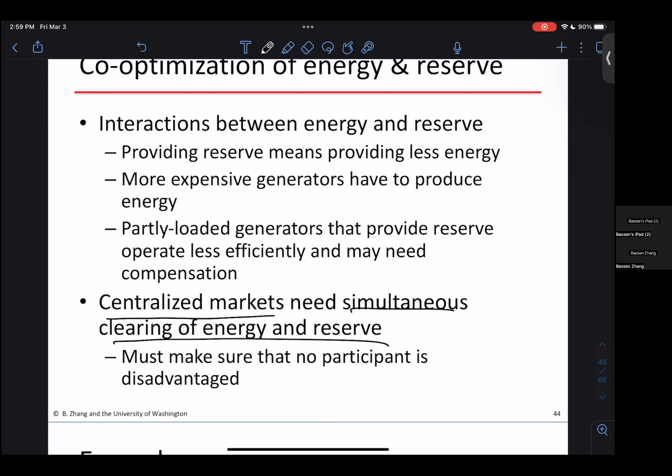And we're not going to think of a sequential way, right? So we're not going to think that energy is more important or less important or has first priority. Today, you just put everything into an optimization problem and solve this whole thing at once, instead of doing this sequentially. So let's look at an example. These things will become more clear if we go through this example. So this is a typical example.

So I made the marginal cost constant for simplicity. As you can see in this kind of example, this says that I can provide this energy at this marginal cost. This is the maximum generation limit for each generator. And some generators can provide reserves, some generators cannot provide reserves. So we're going to write out a system where the energy has to meet the load, and you have to meet some reserve margin for the system.

And we're going to figure out for each generator how much energy you should provide, how much reserve you should have. What is the balancing between energy and reserve given this type of market? Any question about the data? Okay, so why might this number be 0? So why would, let's say, a generator not be able to provide reserve?

So what kind of generator? Let's say I'm extremely cheap. I can provide a lot of energy, but not reserve. I cannot do reserve. Technologically, what limits you from providing reserve? Right. So something like solar and wind, where you cannot do reserve, or something like nuclear, where your ramp rate is very slow. So this is either solar or wind.

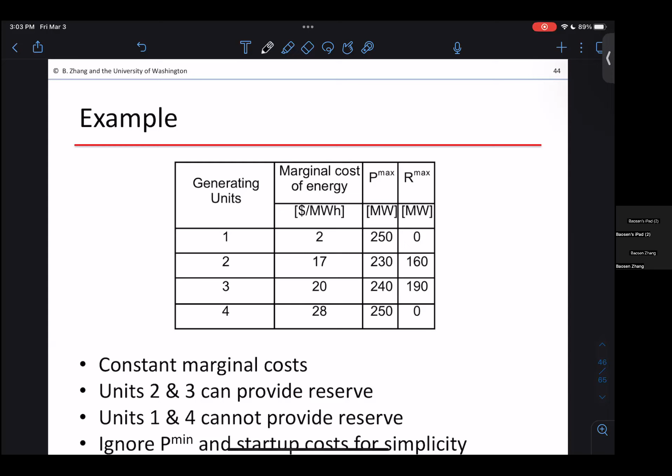So energy and reserve are not separate things for the generator, right? If I'm showing you a table like this, it doesn't mean I have 230 of power plus 160 of reserve. It just means the power you produce and the reserve you provide, summed together, cannot be larger than 230. And the reserve itself cannot be larger than 160. That's what this graph is showing. It's not separate things.

You're a generator, you're providing power as a generator, right? So energy and reserve are coupled together in this kind of generator. Any question with this concept, this graph? That's typically the hardest concept. Good. But what determines the value for ramping? So I just made up this number, this is just a number I made up, right?

So for example, let's say again you look at unit 3. You have 240 of maximum power generation, 190 of reserve. What this is saying is that suppose you are operating here, then you're asked for reserve. What's limiting you is that in the next 15 or 20 minutes, the maximum you can ramp is 190. You cannot go faster than 190. So the maximum amount of reserve you can provide is 190. That's called a ramp limit.

Right, so you're not running out of maximum generation capacity, you just can't ramp that fast. If you go here, you can ramp this, but you're just running out of capacity. So this is called capacity, or headroom; it means capacity. How much capacity have you got left? Okay. Any other questions?

Okay, so this is again, you're providing energy and reserve at the same time, right? So we're gonna set up this market. We're gonna assume that the market is perfectly competitive. We're gonna assume that the generators submit their bids for energy, and then the system operator will meet the demand, right? So we'll meet some demand while satisfying this reserve.

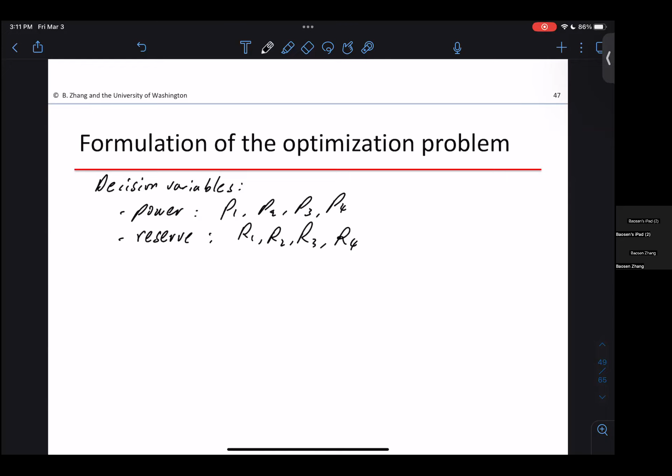In addition, you also have the reserve: R1, R2, R3, R4. So you're not only optimizing over power, you're optimizing over reserve, both together. So what is the objective function? It's given by the price multiplied by power. So the cost is 2 times P1 plus 17 times P2 plus 20 times P3. Okay, so you're trying to minimize this number.

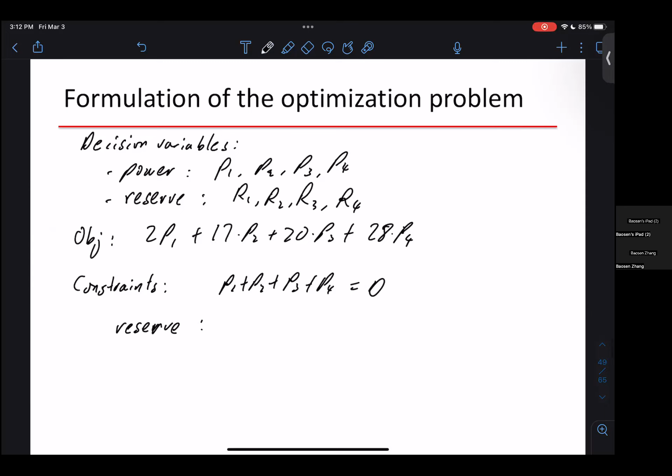Then we have a bunch of constraints, right? The first constraint is our load balancing constraint equals to demand. So the power you generate has to be equal to demand. How do I write the reserve constraint then? I have a power constraint, but let's say my reserve always needs to be at this level. What kind of constraint will reflect that I have a reserve of 250 megawatts?

Equals to 250? Right, so you want it to be at least 250. The important thing here is you cannot write this equal to 250. What you want is to say, I want at least this much reserve. For load, this is an equal sign: your power generated must equal the load. For reserve, it's different because you're not using the reserve. It's a requirement, something that's called if something happens.

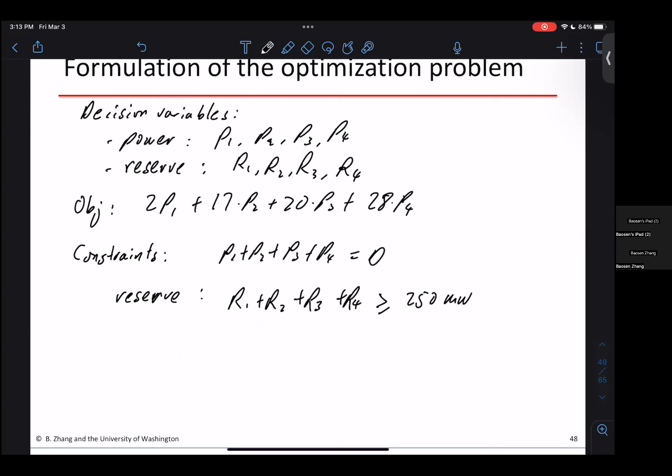So having 250 megawatt reserve is larger than or equal to. You can do 250, you can be bigger than 250 as well. This sometimes makes a difference, actually, having more flexibility on this side. So this is the reserve constraint. Again, the difference is this is actual power being transmitted in the system, and this is what's left over that can be called. So these are your two constraints.

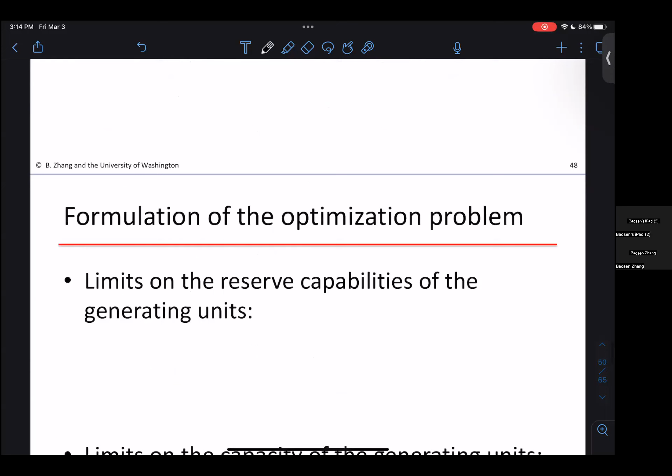And of course you have the generator limits. You have the reserve limits now, because not every generator can provide reserves. So you have some limits on R1, R2, R3, R4. For R1, it doesn't provide reserve, so it will be 0.

R2 can go between 0 and 160. R3 can be between 0 and 190. R4 doesn't provide reserve, right? So this is the reserve that these generators can provide, and they're bounded between these ranges. So if it's 0, we're just writing R1 equals 0 here. That's fine.

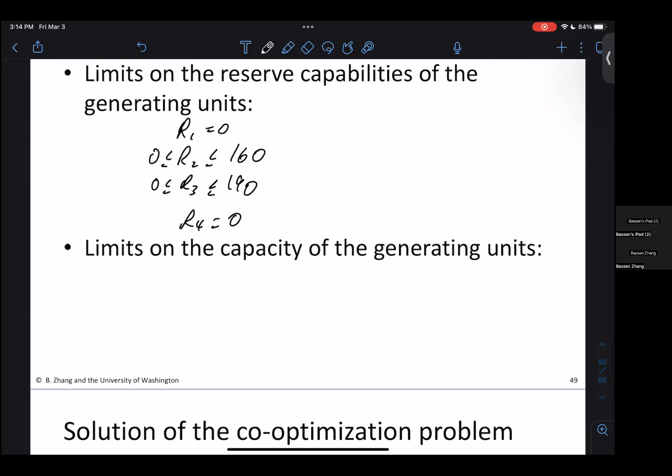Now you have the capacity limit on the generator. For the first generator, the power and reserve together cannot be more than this limit, so this is 250. Right, so these are the limits. The limits reflect that if you're a generator, you're providing both power and reserve. So this is the total when you sum, and this is the limit. That's the coupling constraint between power and reserve.

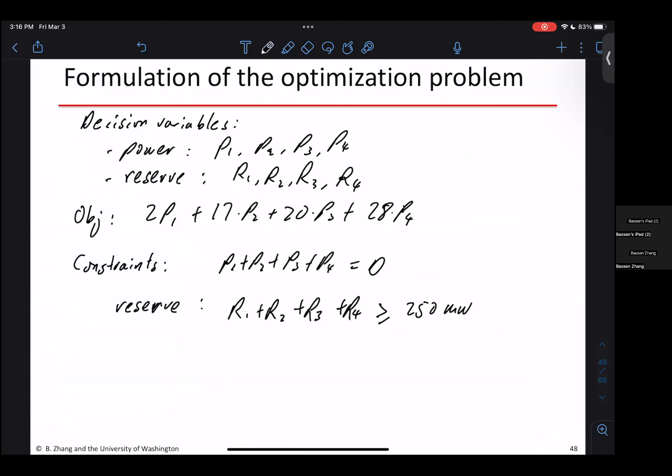Of course you have the more trivial constraints. The power has to be larger than 0, and together when you add them, they have to be less than this total generation. So these are your constraints. Given different demand, you can solve this constrained optimization problem to get what P and R are. We have seen this before: it's an inequality and equality constrained optimization problem. In principle, you can solve this and get the result.

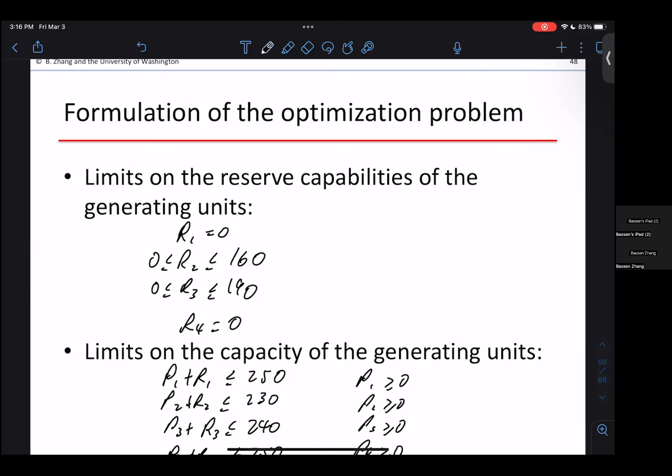In your homework or the final, you will not be asked to solve something this large. There's a lot of choices. Most times in your homework it would be obvious how you do this or what the values are, but this is the principled way of doing this. Questions about this formulation?

So how do I get prices out of this? How do I get the price for energy and the price for reserve? Let's say you solve this problem and got some numbers. You have to pay people, both for energy and reserve. So how do you compute the prices? How do we compute the price for energy? The Lagrangian multiplier for this constraint. How about reserve? Just the Lagrangian multiplier for this one.

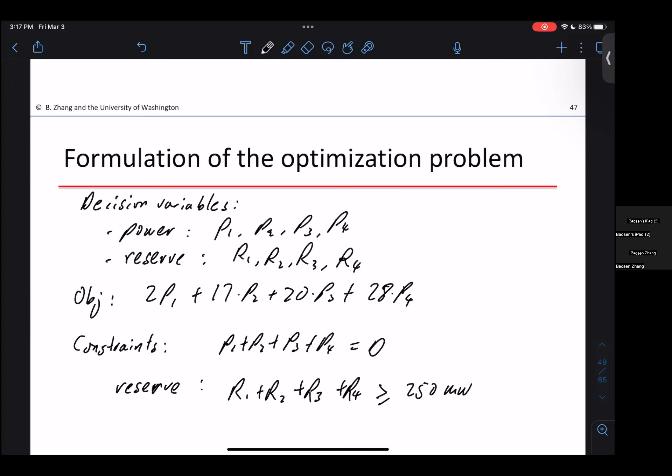So this is how the market's actually constructed. You write out the optimization problem, you look at the constraints associated with demand and reserve, and these are by definition the prices. You solve the problem, figure out the Lagrangian multipliers for both, and those are your prices. Let's say lambda, the multiplier associated here, is the price of energy, and mu, the Lagrangian multiplier here, is the price of reserve. This is the definition of how our markets get prices.

In practice, when you say I'm setting up a power market or introducing new products into the market, what you're doing mathematically is creating a new constraint and interpreting the Lagrangian multipliers of that constraint as the prices of the new product. Whatever product you need, you must express it as a constraint, and the associated multiplier is your price. That's how all these products work.

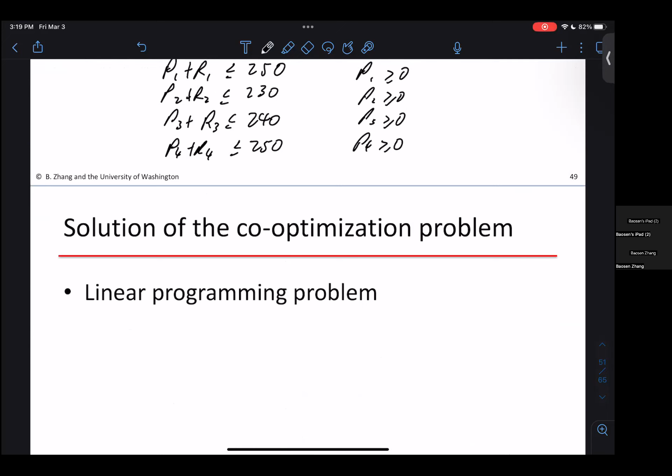In this case, everything's linear, so it's well defined. If it's not linear, it's a lot more work to define the prices, but that's still how we think about it. If you write down this problem, it's just a big linear programming problem: minimizing cost subject to a bunch of constraints. In practice you get your computer to solve this; it's not very hard. You read out the multipliers, and that's your price.

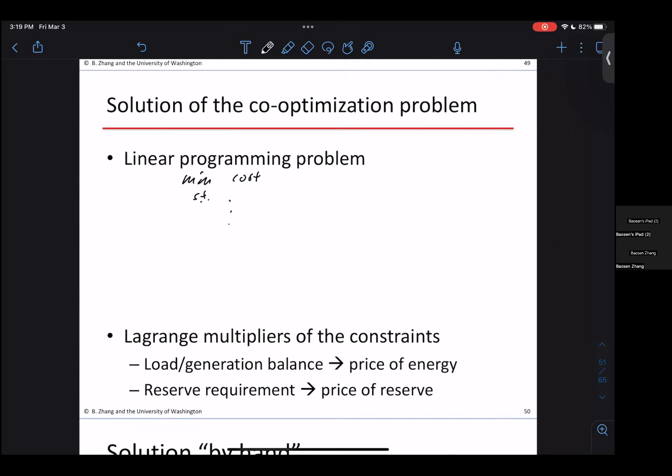We're going to look at the solution by hand a little bit. This is constructed so solving by hand is a bit easy. In your homework and final, the problem will be constructed so you can solve it by hand. For this problem, observe that unit 1 is the cheapest and it cannot provide reserve. So you always dispatch this unit to provide all the energy you need.

And then you can reduce the constraint. Looking at reserves, you can think about different reserve constraints and different power constraints. These two are the only two that can provide reserve. So together, you have three constraints on reserve. You have a lower bound on the sum. You have an upper bound on how much each of them can provide. Okay, so any questions on this?

Okay, so how do you get this number? Even if R2 is at its maximum, you still need 90 from R3. Right, so that's just making this constraint a bit easier to work with. You still need 90 from the other generator to get to 250. Even if R3 is 190, you still need 60 from the other generator. So you can summarize these into this form. Okay, so this is your summary. And what it tells you is this induces a small upper bound on the power generation.

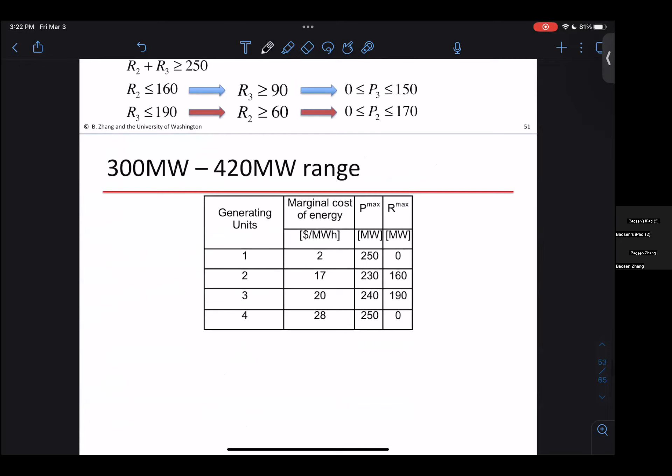Right, so now remember our load. We're going to look at what happens if your load varies between these ranges. Given different ranges of load, the behavior is different. So let's say my load is between 300 and 420. Okay, so let's say this is the load. So how will you generate? First you get unit 1 to produce 250. This is always the case. Okay, so unit 1 just provides 250.

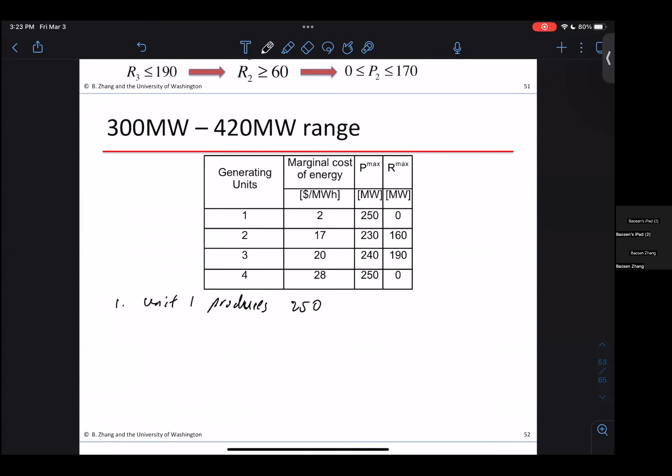Then unit 2 is the cheapest generator after this one and has a limit from 0 to 170. Okay, so this is where the 420 range came out, as you add 250 to unit 2's range of 170. So being within this range, unit 2 produces the rest. As the second cheapest generator, we have enough capability to provide the rest of the energy. So you just produce the rest up to 420, up to whatever you need.

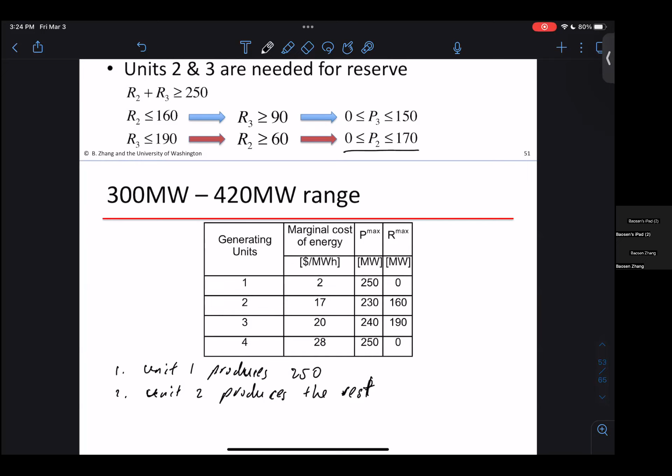What is the marginal cost for energy here? What is the marginal price for energy? So unit 2 is producing the rest. Okay, so unit 2 is the marginal unit. So here the price for energy is $17 per megawatt hour. Any questions about this? Okay, got it.

Right, so if it's exactly equal, you take the lower one by convention. But that basically never happens. Yeah, if it's exactly equal, you take the lower one. I forgot actually which one you take. There's a convention that you take. Yeah. But otherwise, any questions?

Okay, so the more interesting question is, what is the unit price of reserves? What about reserves?

What happens to reserve? What is the unit price for reserve in this case? I need 250 of reserve, okay, within this range. So I dispatch generator one, I dispatch generator two up to its limit of 170. Do I need to pay anything for reserve? Does the reserve have a price?

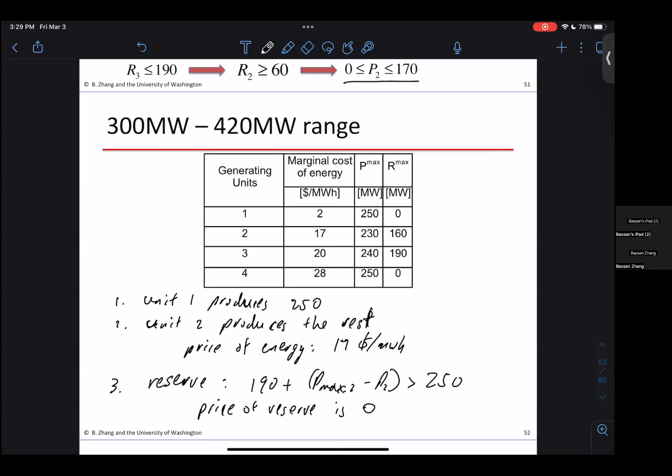Okay, so then this changes if your load keeps increasing, right? So let's say you go above 420, then what happens is your unit two is capped at 170. So unit two, even though it seems to have a maximum generation of 230, because you have to provide reserve, you appear to be a smaller generator. So you cap at 170. So here, unit 3 is marginal.

So unit 3 being marginal, this means the price of energy is 20 per megawatt hour. Okay, so that's unit 3's price. So now the reserve is more interesting. Reserve is no longer free. So reserve now has a price.

Okay, so let's think about the reserve price. So reserve price means if I need to increase my reserve beyond 250, what happens? Let's say I increase my reserve a little bit beyond 250 to 251. Where does this 1 megawatt of reserve come from in this setting? How would I change what happens to unit 2 and unit 3 if I increase this reserve by 1 megawatt?

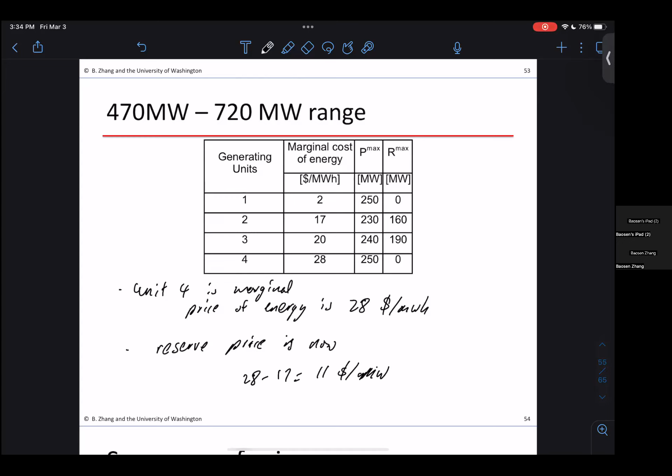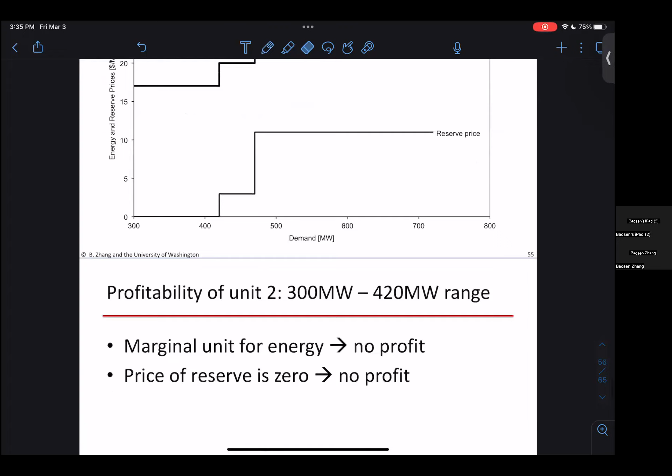So we're not going to compute the profit. Let's skip computing profit, but you can go in and compute the profit for things generating both energy and reserve. Reserve can make money depending on what else is happening in the system. So normally as a generator nowadays in the market, you go in and you bid your energy and reserve at the same time. So you tell the system operator, this is my energy production cost, plus I can do this reserve. And then the system operator clears everything at the same time.

All right, any questions? Okay, so that's how things are done today. In the next 10 minutes or so, we'll talk about demand side provision. So until now, the generator provides reserve. The demand pays for this, right? So demand pays for everything in the power system market. If you're demand, you pay for whatever service is there. You pay for reserve, you pay for everything like that.

But once people were talking about ancillary services, it was very quickly recognized that demand can also do ancillary services, right? Ancillary service just means that you should be able to cover the load. So generation has to equal the load. Then when something happens, it's equally good if I increase the generation or if I decrease the load. So decreasing the load also, in some sense, provides ancillary services. This is a huge area of research and people are trying to put it into the market. It's basically demand response. If demand has some capability of providing services, then demand should get paid, rather than demand paying for everything.